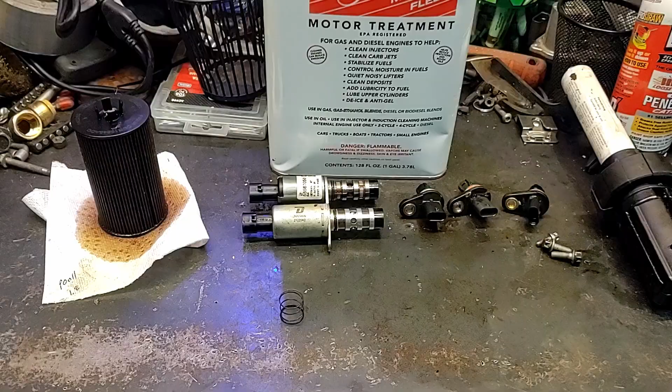So, alright, this is everything we did. Nothing changed. If you keep watching the video, you'll see sensors didn't change it, oil changes didn't fix it, Seafoam treatment didn't fix it, everything stayed exact. This is what fixed it. I took that out of the car and I'll show you what it is. So in your oil filter housing, when you pull your oil filter out, you're going to see this tube sticking up and you're going to see this right in the very bottom of the oil filter housing.

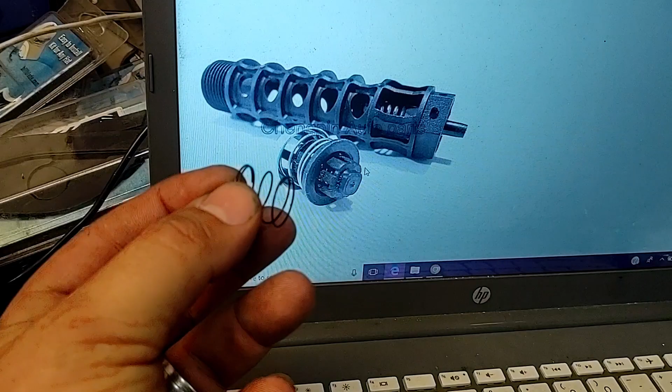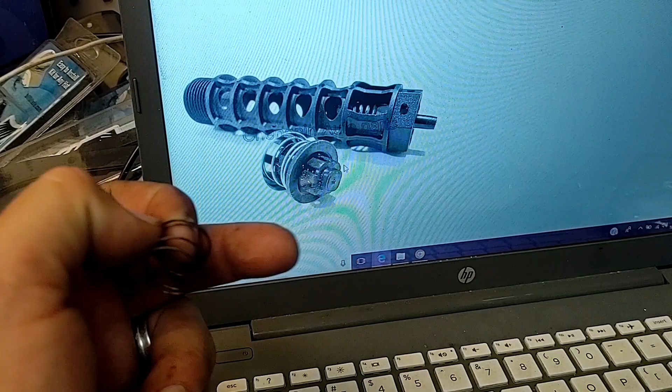And what it is, it's an oil drain back valve. And this spring, you can see, goes right on the back. All I did to fix this car was pull this out with a pair of needle nose pliers, take this spring off, and then put that back in the hole. What is happening is this car does not build enough oil pressure at idle, and this spring is holding that valve open so that oil pressure is bypassing the oil filter and going straight back into the oil pan.

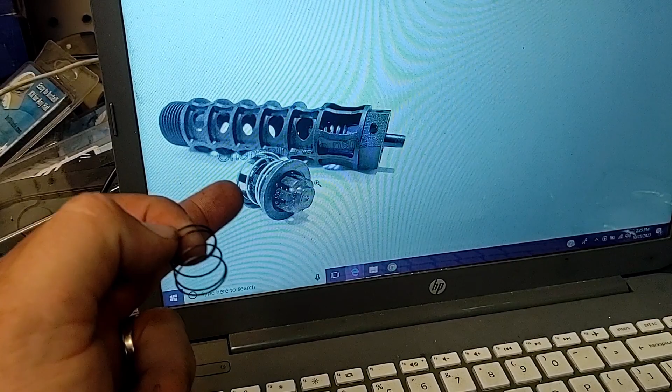That is just a drain when you change your oil so that the oil in the filter housing can drain into the pan. You take this spring off, it closes that off. And at idle, you will still have good oil pressure because there's nowhere else for the oil to go. If you have too much oil pressure, that's what this valve is for. This valve will push down, the oil will get pushed into the oil filter, go through the top of the oil filter, and back down to the pan if you have too much oil pressure.

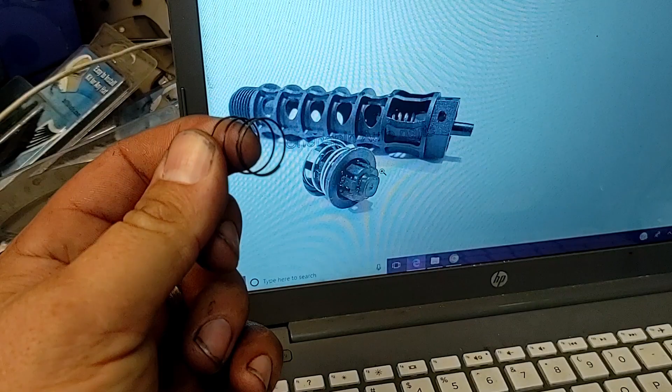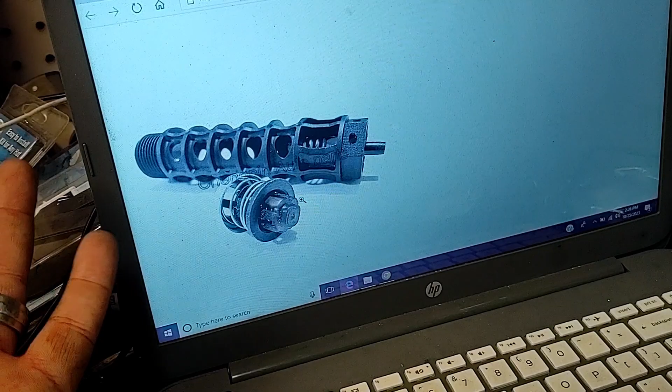So pulling this spring out does nothing other than when you change your oil, you'll have a little bit of oil left in the oil filter housing. And I'm fine with that if it fixes it and gets this guy back down the road. This stupid little spring holds this valve open too far. The car drives perfectly fine. You don't get a check engine light unless you sit at idle, which you always do at a stop sign or a stop light. So all I did was pull this spring out. Good to go. And that is right in the bottom of the oil filter housing.

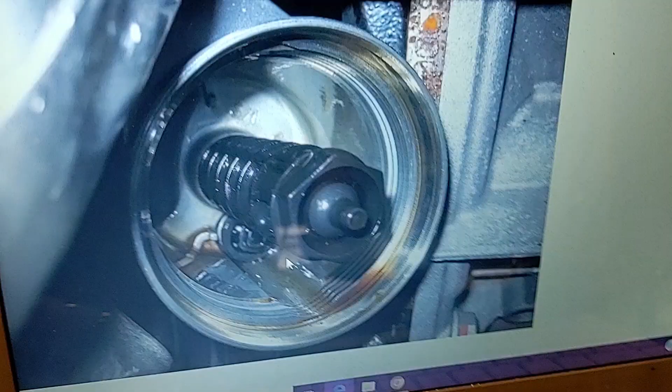Let me see if I can get a picture. All right, so this is on a computer, so it's kind of hard to see, but there's your valve right there. You can unscrew this if you want. I didn't have to. You grab that with a pair of long needle nose pliers, pull it out, pull this spring off the bottom of it, and then pop it back in. And you'll be fine. This doesn't hurt anything.

Take it with a grain of salt. You don't want to do it, fine. Live with your check engine light. But you're not going to fix your check engine light unless you put in some high volume oil pump, several hundred dollars worth of work to put that in. So if you're having a problem and you've done all the rest of the stuff I'm going to show you later in this video, do this and you'll be fine.

Obviously, the stuff that I'm going to show you in just a minute, these take 15 minutes to change out. They're kind of pricey. You can see I changed this one because it's Dorman. I'm not a huge fan of Dorman, but this ended up not being the problem. So there's probably nothing wrong with this one or that one. These are the sensors. We changed out the intakes twice, and here's an exhaust.

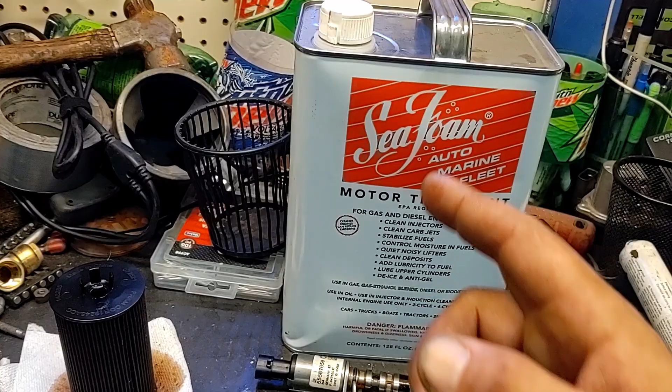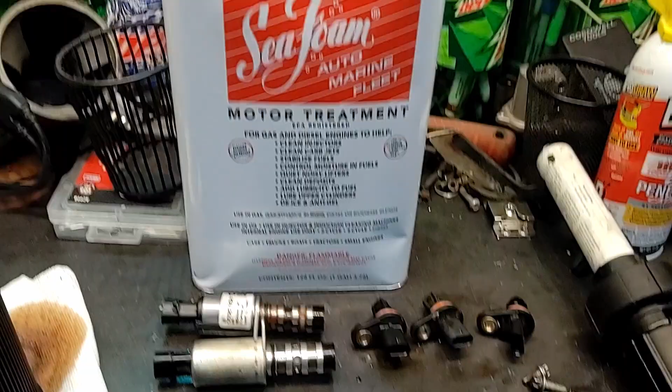We did Sea Foam in the oil. Obviously you can see there's the oil filter. There's nothing wrong with that oil filter. It is clean. He's changed his oil religiously on this car. We have no idea why the engine is doing this. We Seafoamed it, he drove it 1,000 miles. Nothing changed. Not one thing changed with the Sea Foam cleaning it out. Chevy's like, oh, you got an oil passage that's stuck and full. I'm like, no, that's not it. So anyways, the guy takes care of his car.

I had the whole top of this motor off, the valve covers, pulled the spark plugs. Everything on this car looks perfect. There's no carbon buildup in the motor. There's no oil passages that are plugged. Nothing. There's a tiny bit of varnish in the engine, and that's just going to come from normal wear and tear on your PCV system.

But yeah, nothing on this car seemed out of ordinary for it to have this check engine light and the low oil pressure at idle. Like I said, it's only got 60,000 miles on this car. So I finally did this, and I've been driving it for about 150 miles. No check engine light. We're just trying to get it to pass emissions now, should be perfectly fine. He said he didn't want the car back until it was fixed.

So it's been my daily. It's been nice having a 35 mile per gallon car. My truck only normally gets 12. So this is actually pretty nice for me. But yeah, and I hate Chevys.

The emissions on Chevys, I don't know why. I've had them take up to 500 miles to get ready for emissions, and it is so stupid. Ford, I can drive 70 miles up the freeway and back. It'll be ready. For some reason, Chevy is just weird like this.

But anyways, that's the beginning of this video. Probably already into it 5 minutes. I hate long videos, and I only make videos if I can't find the answers on YouTube. I have watched every single video on YouTube. Nobody has done this. Everybody has either replaced the head or replaced the engine. And so I can't find a single video where somebody has actually fixed it this way by pulling the spring and getting the oil pressure higher at idle.

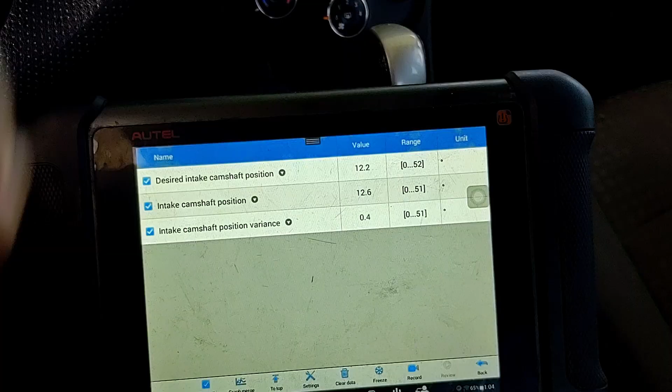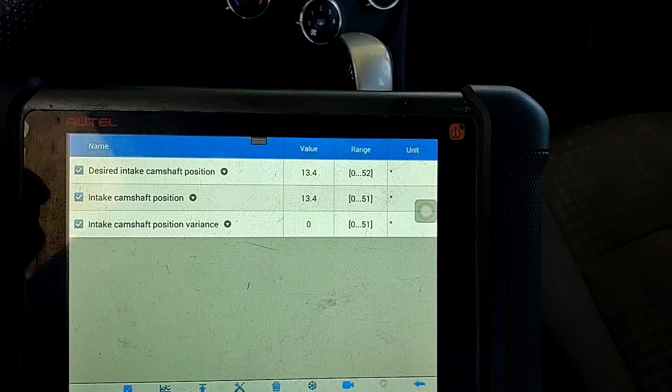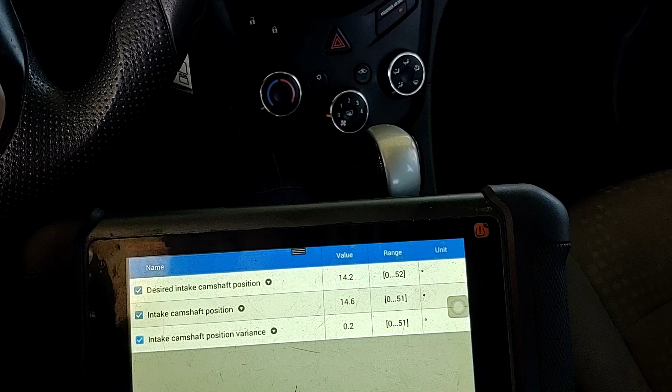All right, so here you can see this is what it wants, this is what it's giving it, and this is the difference. Before we did the oil change, it was probably 4 or 5 all the time, variance difference. And the customer has replaced both VVT solenoids, the camshaft position sensor, and they had me take the valve cover off and check the timing, make sure the timing's correct, and it is. There's nothing wrong with this engine other than oil pressure.

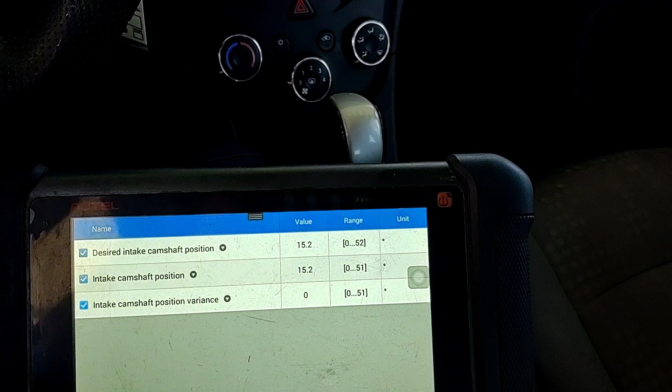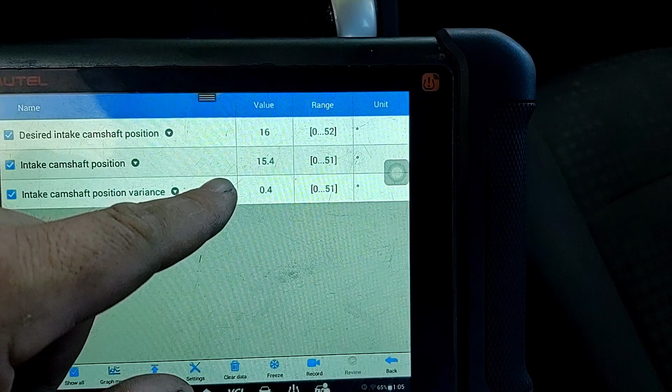So we have just started this. The car's been running for maybe 2 minutes. We're here to get gas, and then I'll go drive it. But I'll take a video of this here in about 10 minutes. And you're going to notice that this is asking for 20, and this is only at idle. When you're driving, it's perfectly fine. It'll stay at zero variance.

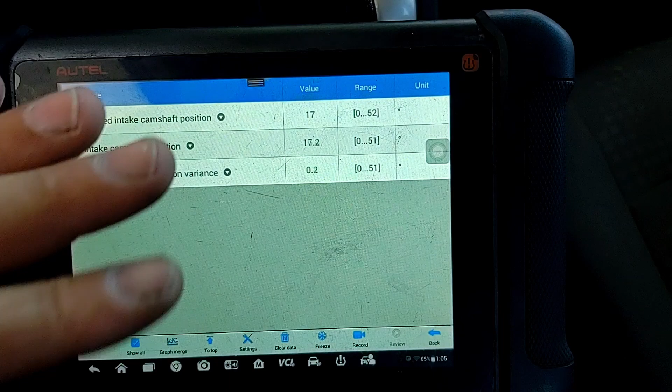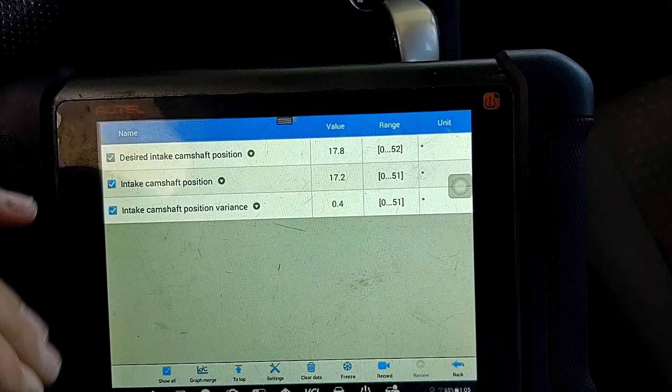That just means that there's no oil pressure getting to the head, and there's either oil sludge or one of the oil passages isn't right. And so what you're going to find is you're going to be looking for this variance, and at idle, it'll be like 13 or 14, and there's nothing you can do about this. This motor is junk.

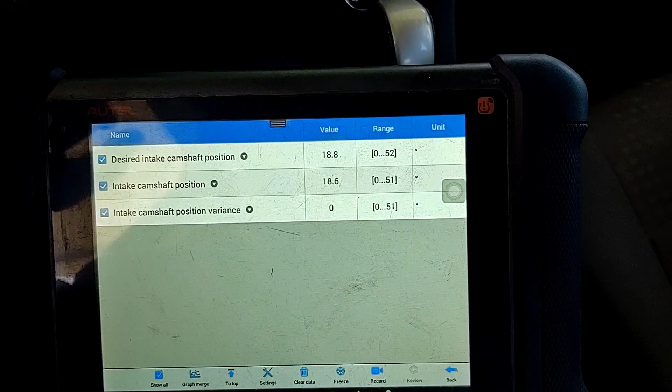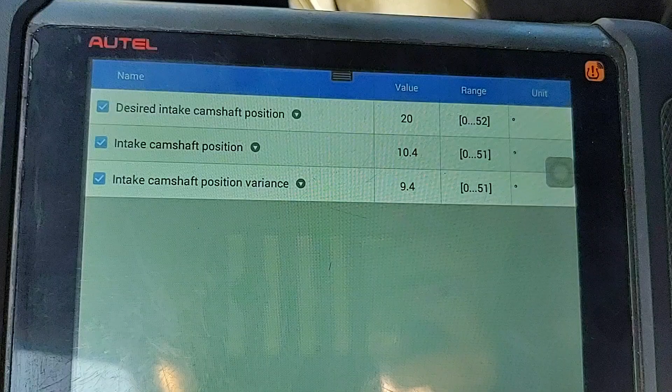So we've been driving about 10 minutes, and the engine's gotten hot now. You can see the oil pressure has dropped because the oil got thin. It's now at 9.4 variance. When the engine gets really hot, it'll go up to 14 or 15.

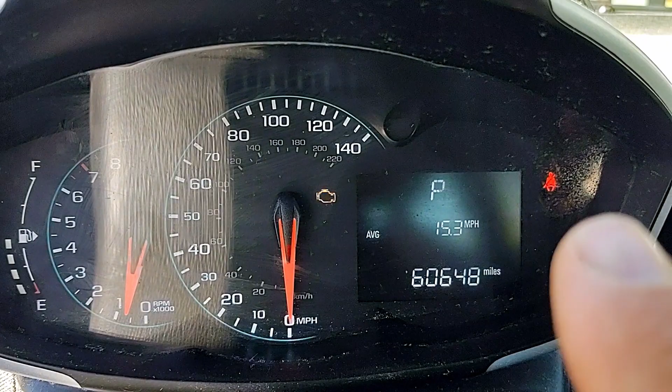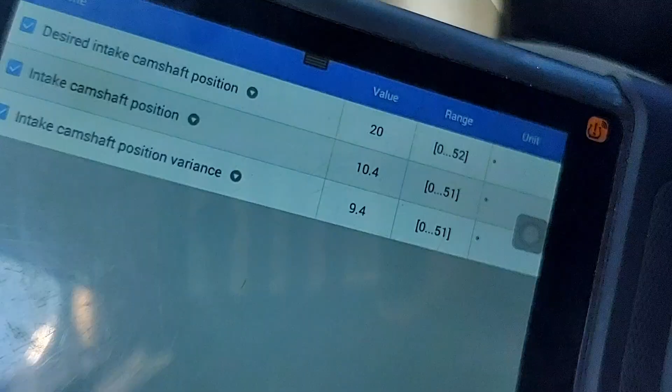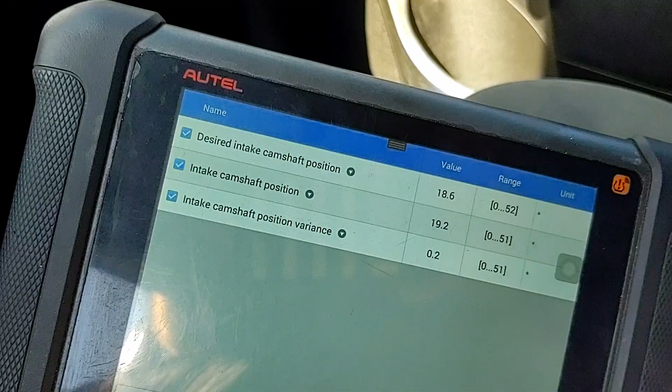And just to show you, the check engine light comes on for that code P0011, and this only has 60,000 miles on it. That's it. So if I rev the engine up, it gets oil pressure and the variance goes away. So this engine is losing oil pressure.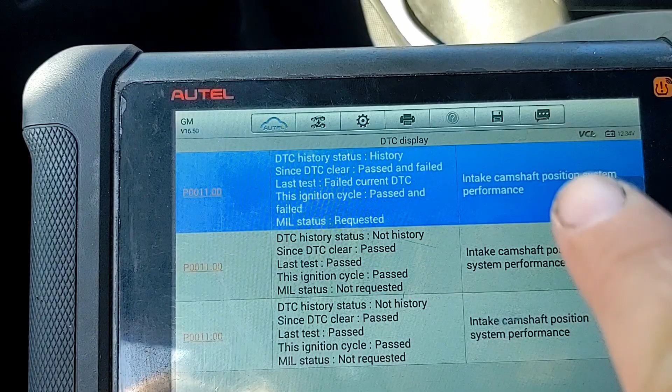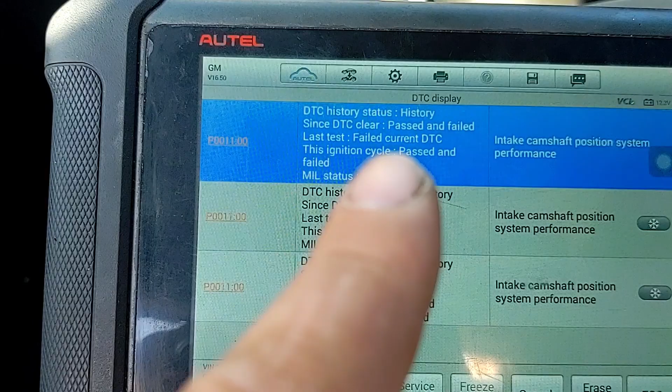So this is just showing you the codes that it sets. These two over here are the ones that set the check engine light, but it is a P0011. It passes when you're driving, when you've got oil pressure, but then it fails when you're sitting at idle. So the check engine light will come on whenever you're stopped at a stoplight.

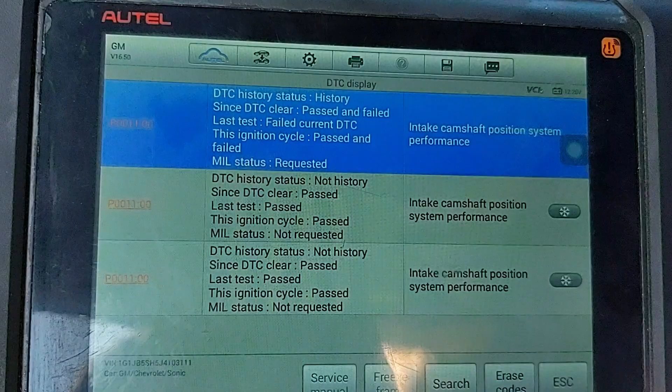And it drives perfectly fine. Nothing really wrong with the car. It drives fine, it just doesn't like where the camshaft is, and it decides it wants to set the check engine light.

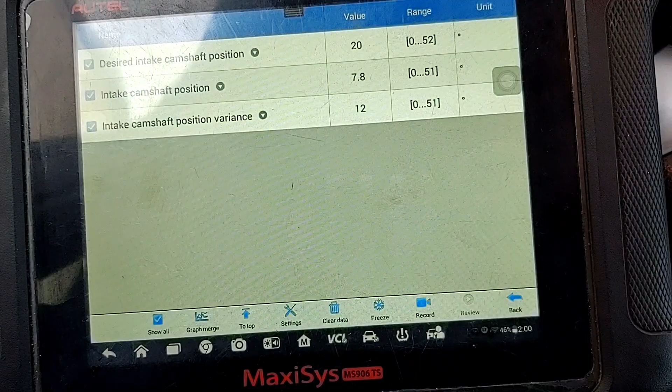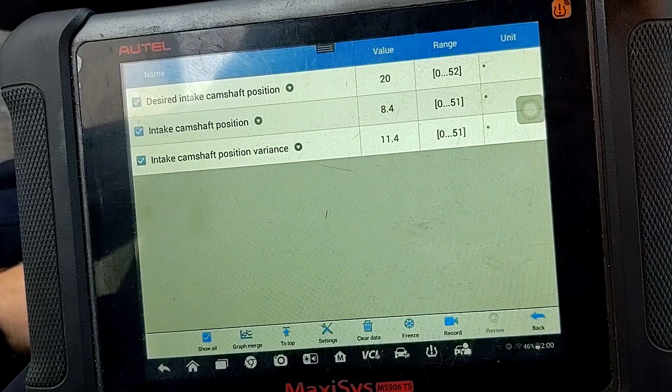Okay, so I'm just going to smash these videos together into a bigger video. But this one is just showing what it's sitting at right now. It's hot. We've put Seafoam in it. And the customer is going to drive it for however long it takes, and we'll do an oil change and run these values again. If it takes too long, I'll just post this video and then post another video after it.

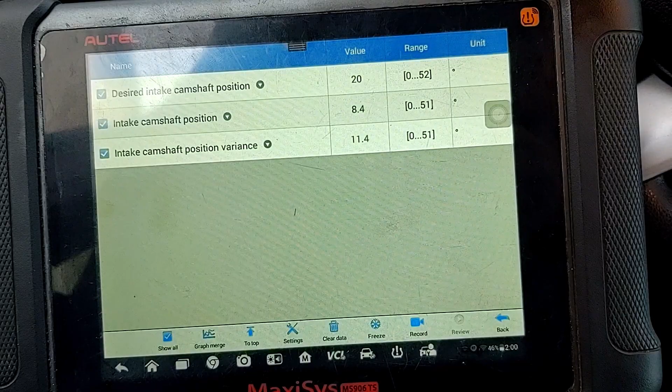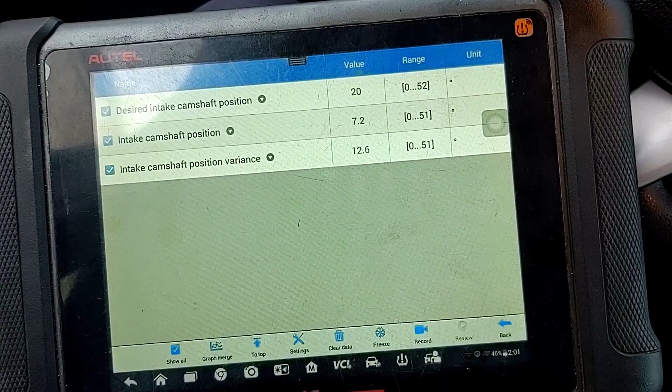But that's the plan. The customer wants to try and save it without doing a whole lot of work. He's still got 6 months left on his registration, so hopefully he can get in like 3 oil changes before then, because I think it's going to take a while to either burn out whatever sludge is in the motor and get that VVT solenoid working again. So wish us luck.

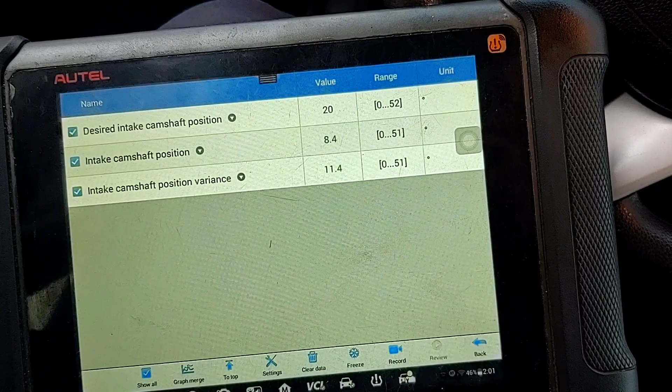Alright, so here's some good news on the Sonic. I have done something, it's not really questionable, but there's a drain in the oil filter housing. It is used when you're doing your oil changes: this valve will pop up and let the oil drain back into the crank so you get all of your oil out.

What I have done is I've removed the spring in that valve. Because what I was thinking is that valve is sticking open, and at idle it is giving low oil pressure because the oil is getting pumped to the filter housing and then draining back through that valve. And so far it seems to be working. So let me change the view and I'll let you watch this.

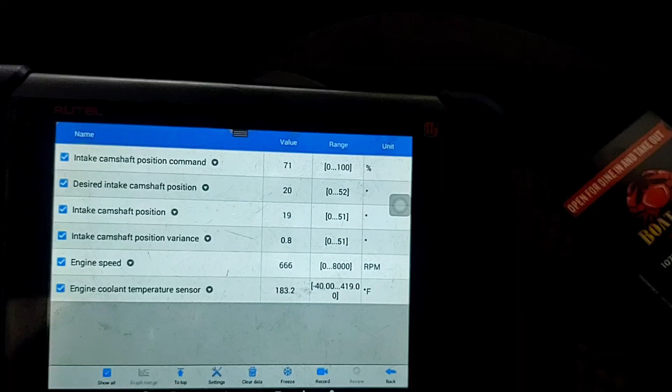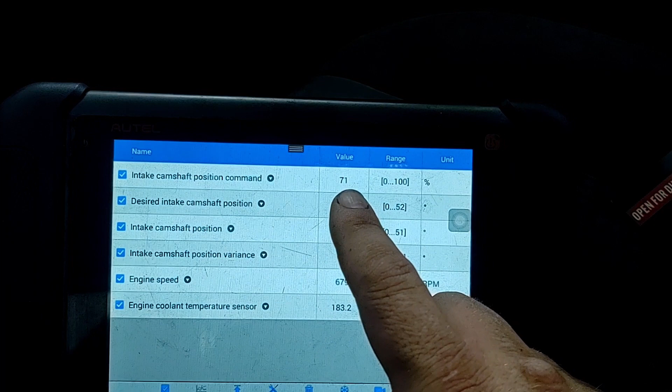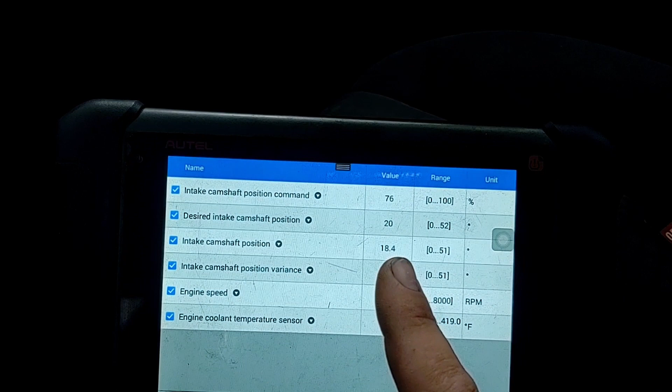Alright, so you can see the car is warming up. It is 183 degrees right now. It will get up to almost 200, so we've still got a little bit to go. But I don't know if you remember in the last video, this was pegged at 99%. Intake camshaft position is at 69-70 right now, and we're almost hot. And I remember that would just be stuck trying to get as much timing as it could.

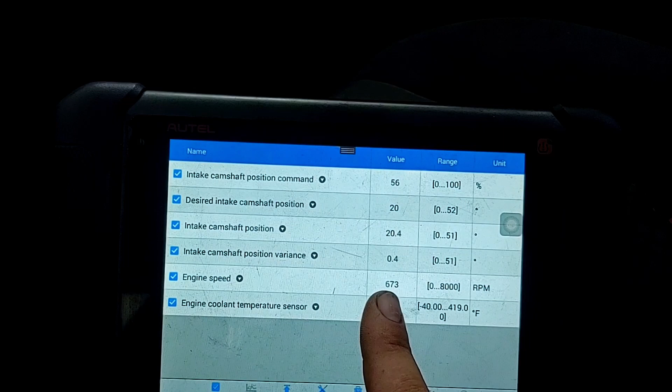And you can see it's asking for 20 and it's giving it 19. It's basically giving it 20. So the variance is very minimal. And on the other video, this was always between 9 and 12, sometimes 14, 15, the variance in degrees.

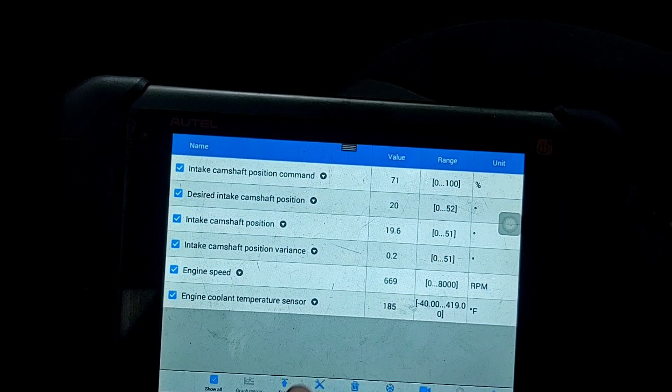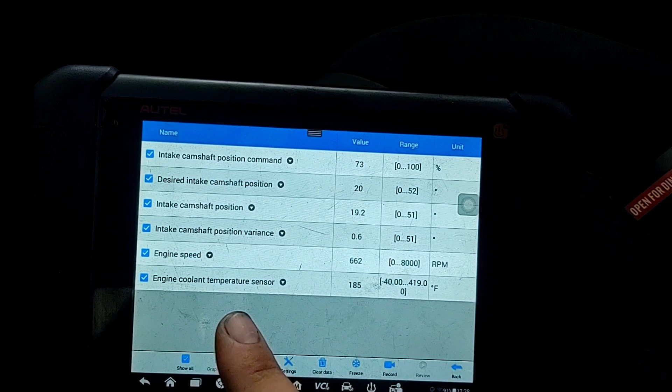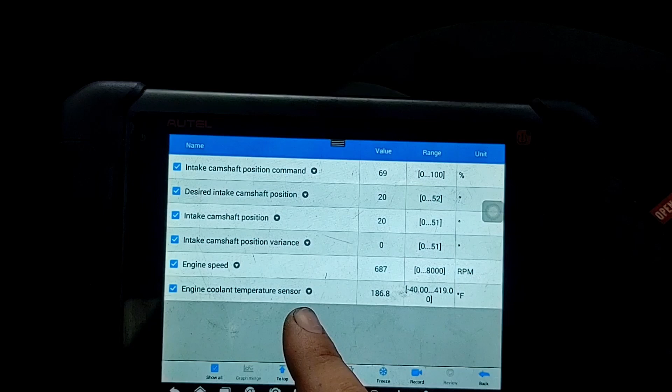I've taken the whole top of this engine apart a couple times to clean it, and there's zero sludge in this engine. So everybody that's saying that it's a sludge matter, the Seafoam would not have fixed this at all. It's a low oil pressure at idle problem, and you're never going to get rid of that unless you're putting in a high volume oil pump or something.

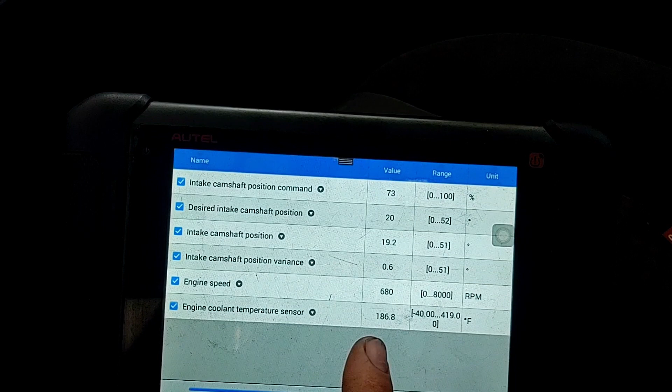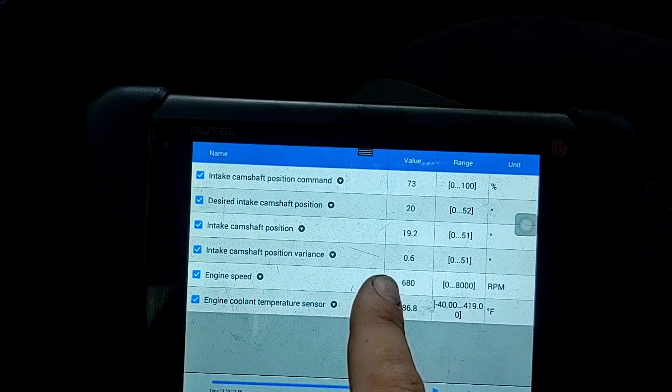But I'm going to go drive this. You can see it's still got a little bit warmer to get, but only about 10 degrees. And it is 73. I'll take another video if that goes up to 99 and the variance comes back up. But I remember this used to be 12s, and I'll have to go back and check my other video, but that used to be a lot higher.

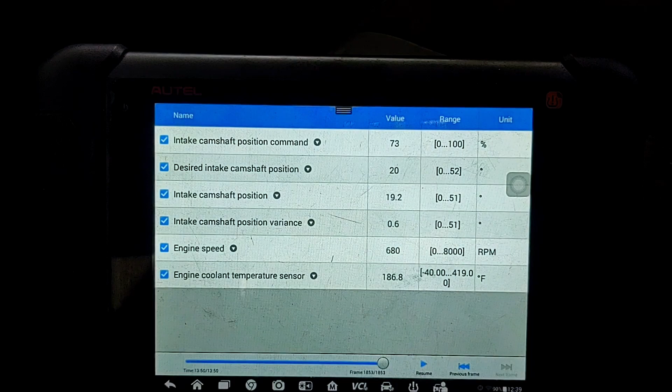So taking out that drain back valve in the oil filter has done something, and it has helped. So this just goes to show that it was a low oil pressure problem and not a sludge problem.

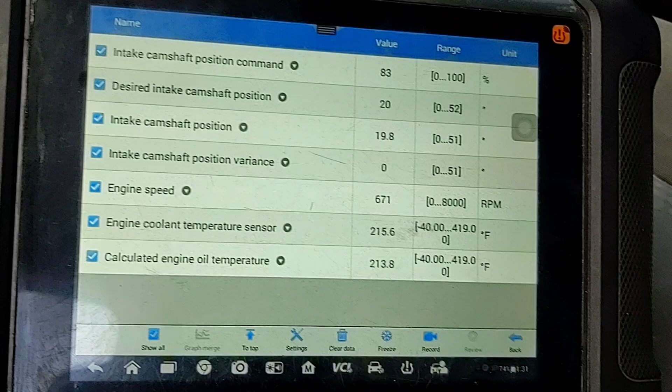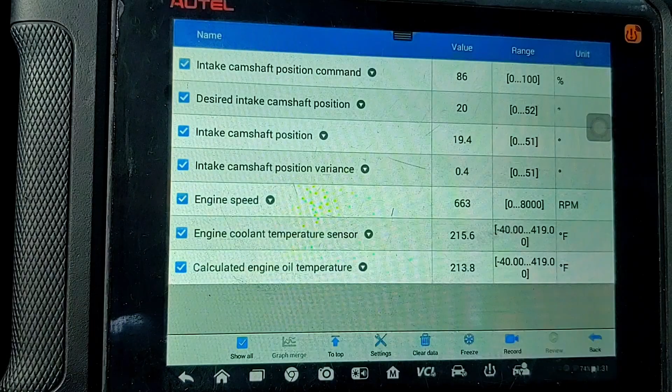Alright, I'm going to call this a win. I've been driving it for about 20 minutes now. It is 215 degrees. It's idling at 600 RPM, and the variance is still 0. And you can see right there, 85 is the max that I've seen, a little bit higher, but it averages right around 80.

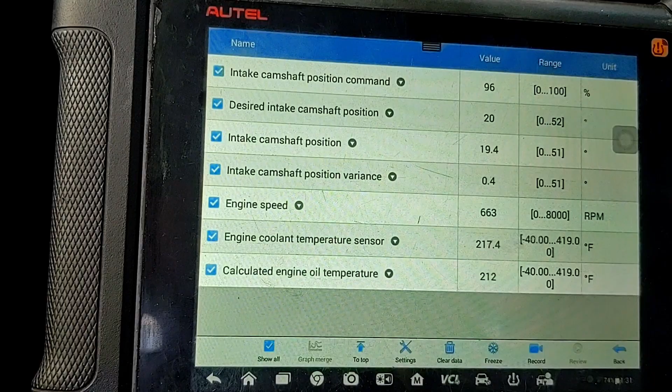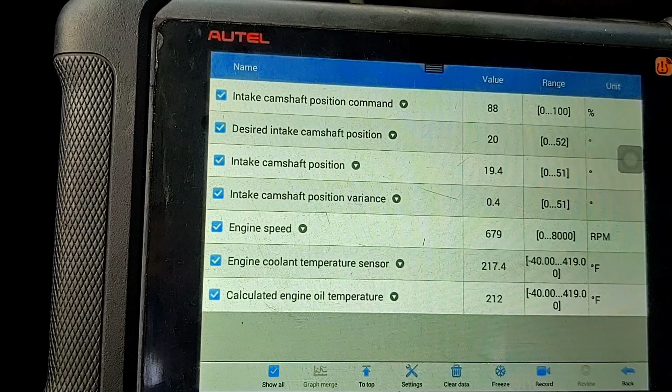And before it was pegged at 99, like I said, it was trying to give it full blast and still had 12 on the variance. So I'm going to call this a win, give it back to the customer, and see if he can get it emissioned now.

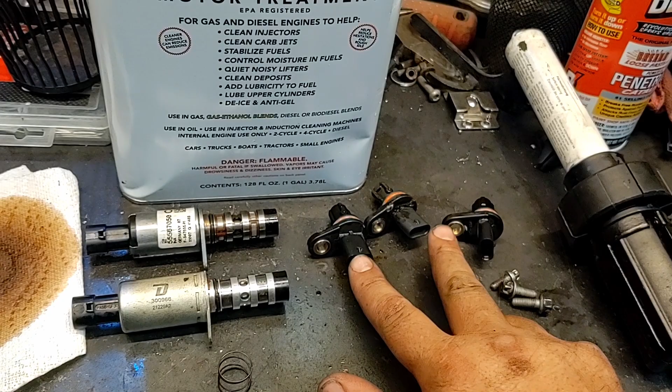So then you can see these are the exhaust camshaft sensors. And this is an intake camshaft position sensor. So we replaced that, replaced the exhaust. Can't swap them back and forth on this because you can see the angles. The plugs will not go in them. And then we did the Seafoam treatment on the oil, thinking maybe there's a blocked passage, because we did an oil pressure test, found out it's low pressure at idle, all that stuff.

And then I even took the valve cover off, and this is when I found out that this engine is not sludged at all. Took the valve cover off, checked timing, timing's perfect. It's got 60,000 miles on it, so it's still the original timing from the factory. So these go on the engine kind of like that, and there's a big bridge that holds these together underneath the valve cover. And so we're like, okay, maybe there's a restriction in those passages.

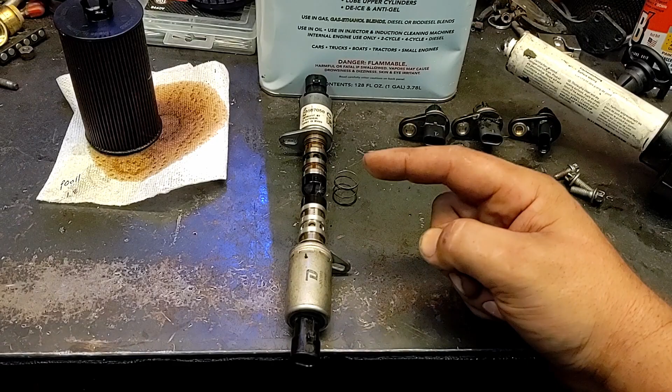You don't have to take that cam bridge off. One guy on YouTube says that gets plugged up. The oil passages in this cam bridge are so big, you would have to have an insane amount of buildup of crud or sludge to block those passages. The engine feeds the oil through a center port right here, comes up and then splits off to the exhaust and the intake side. And the oil ports are that big around to feed these solenoids. In order for that bridge to get plugged up, you would have to have an insane amount of sludge.

So if your engine looks clean when you take the valve cover off, do not take this bridge off. I was able to take the bridge off and reseal it without taking the front timing belt stuff off. But the proper way to reseal this would be you'd pull your timing belt off, then your timing gears, then the backing plate for the timing gears, and then you can get access to 2 screws right here. I was able to kind of finagle my way in there and get it off. I do not recommend doing it, but I didn't want to do all the timing stuff.

It was not dirty. Sealed it back up. That's what the sealant's for. But don't take it off. That is not going to be your problem. That guy on YouTube is, oh my God, he's so full of shit. I did it just to check it, and I was so pissed. There's no way these holes are going to fill up with sludge, especially since the rest of the engine was clean. But yeah, this was what ended up fixing it. Hopefully I never have this again, but if I do, I know where to go. So, yep.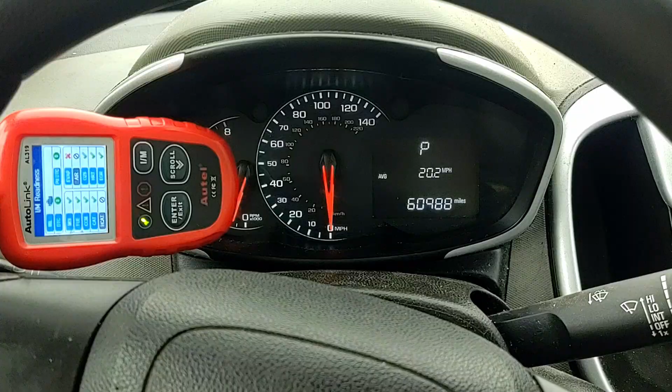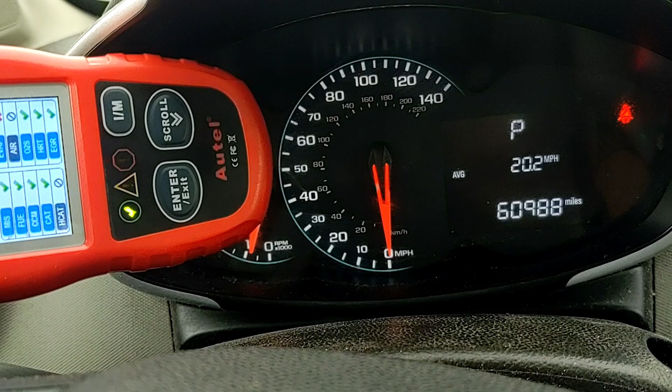Alright, so this is going to be the final part of it. You can see it's got just under 61,000 miles on it. I can't remember the entry miles. When I'm editing the video, probably put 1,000 miles on the car, roughly, maybe 400 or 500. But you can see it's ready for emissions. It's got 1 not ready.

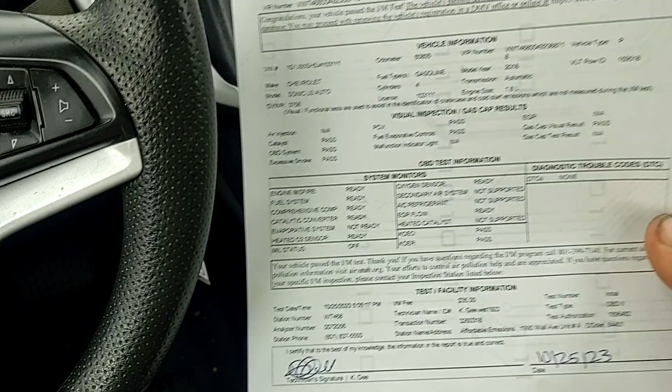So check engine light is not on. It is running. You can see the check engine light still works. So the car is obviously fixed. And then here is the pass. So it passed, no problem. It's just got the evap system not ready, and who knows how long that'll take. But that is the fix. I'm calling it good.